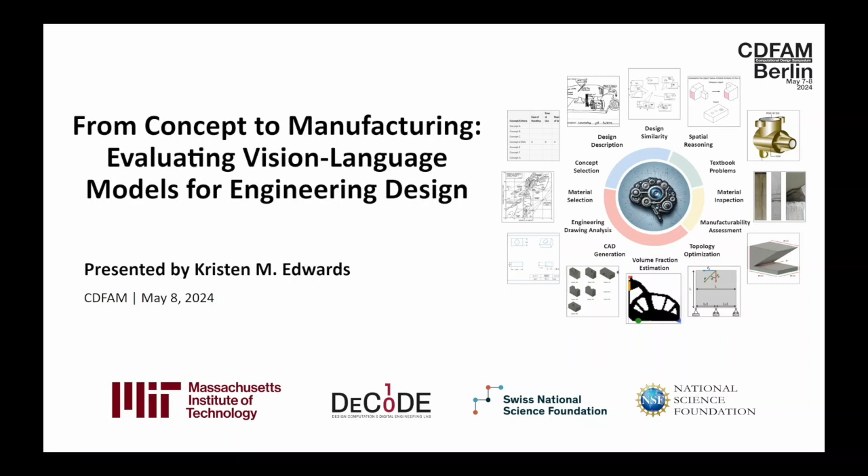Today, I'm excited to talk to you about a recent research work that my team and I completed called From Concept to Manufacturing, Evaluating Vision Language Models for Engineering Design. So to briefly introduce myself, my background is in mechanical engineering. I hold a bachelor's and master's degree in MechE from the University of Maryland and MIT respectively. And I am currently a PhD candidate at MIT in the DeCoDE Lab, where my research is largely around the interface of artificial intelligence and engineering design and development.

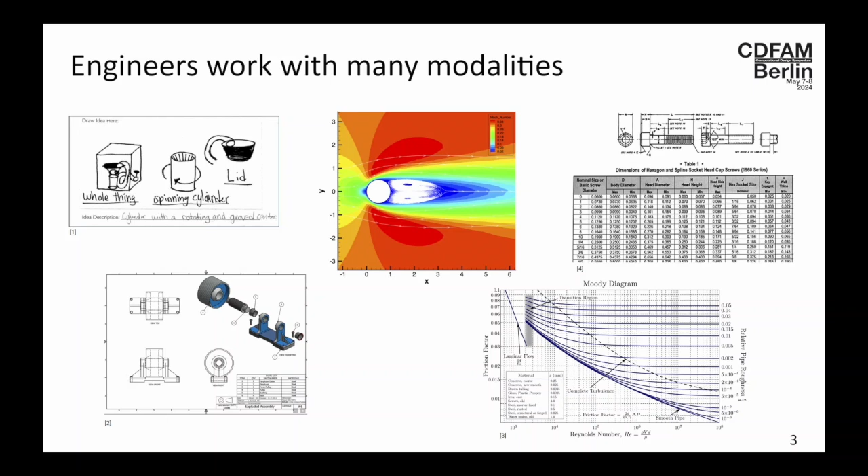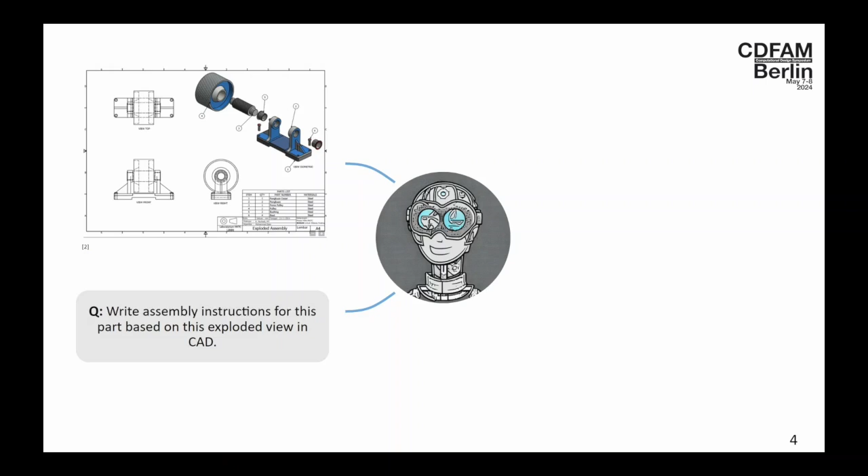So without further ado, as engineers, we work with data in tons of different modalities. You might be looking at a hand-drawn sketch from the early stage conceptual design phase, or a CFD simulation, or even a table of part information for speccing parts. Because of this, a useful AI agent for engineers would need to be able to intake these different data modalities. For example, taking in an exploded view of a CAD assembly and the prompt instructions, write assembly instructions for this part, interpreting both logically, being able to cross-reference them, and then outputting logical and coherent instructions that would be useful for an engineer.

This feels like science fiction, but it's interesting to ask how close are we to an AI agent that could actually look like this? Well, there do exist vision language models, which are multimodal machine learning models. Some of them that you might have heard of are GPT-4 Turbo or GPT-4V, Claude, Gemini, LLaVA 1.6, and these are very similar to large language models, which have had a lot of traction recently. The difference is that they're not just trained on text, but they're also trained on images. And in part of being called large, they are billion parameter models that have been trained on much of the internet.

Because of this, there are a couple key qualities to vision language models, or VLMs. The first is that VLMs are quite versatile. Anyone who's tried out some of these has seen that you can give it many different tasks from many different fields, and it has some sense of understanding. This brings me to the second point, that VLMs have some sense of global knowledge. And this, as I mentioned, is because they've been trained on much of the information available on the internet. And lastly, via their chatbots, there's a simple and intuitive interface. So the barrier to entry for an engineer using this is quite low.

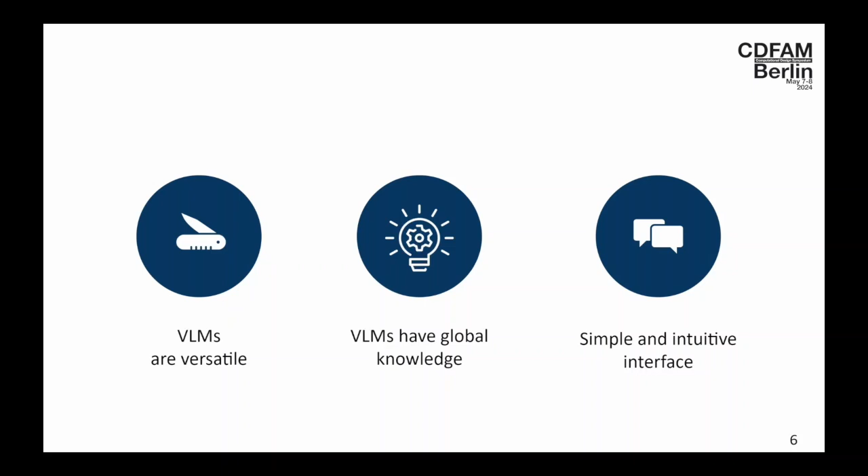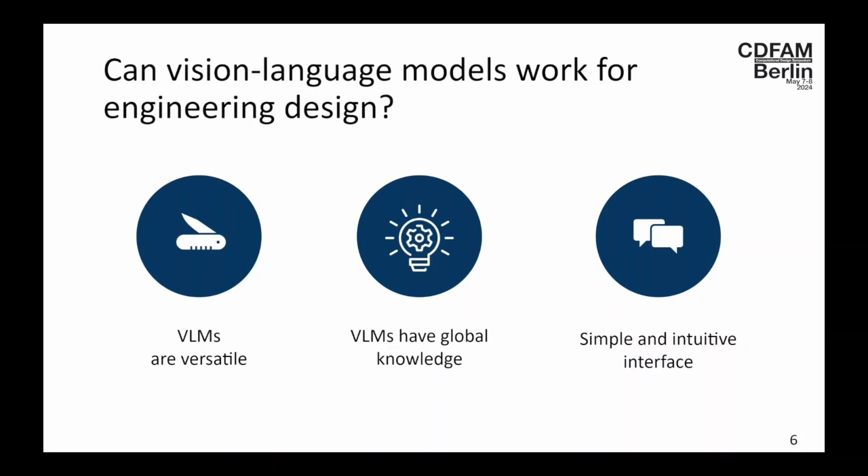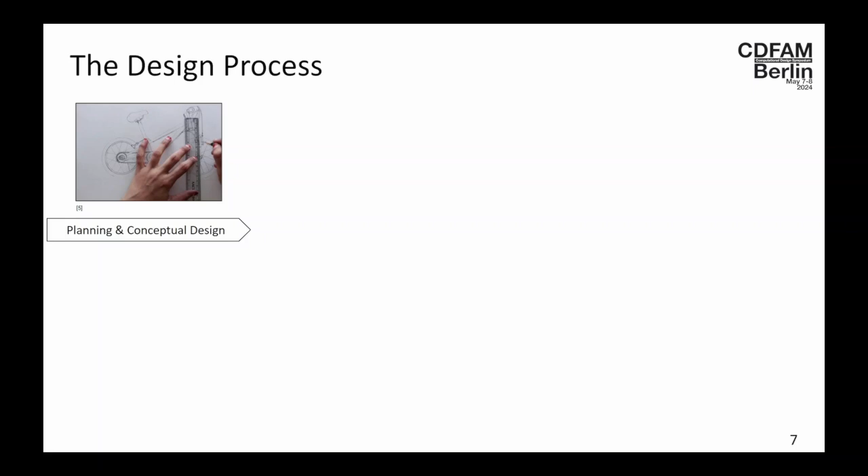But this beckons the question, can vision language models actually work for engineering design? And this is the question that inspired this work and that I'll try to touch on throughout the rest of my presentation. So this is quite a broad question, and in order to scope it down, my team and I decided to scope it via the design process. So we all have mechanical engineering backgrounds, and we used the typical product design process that we're familiar with, which starts typically with planning and conceptual design. This is where you might identify user needs, determine your product specifications based on them, and start ideating, coming up with tons of different concepts.

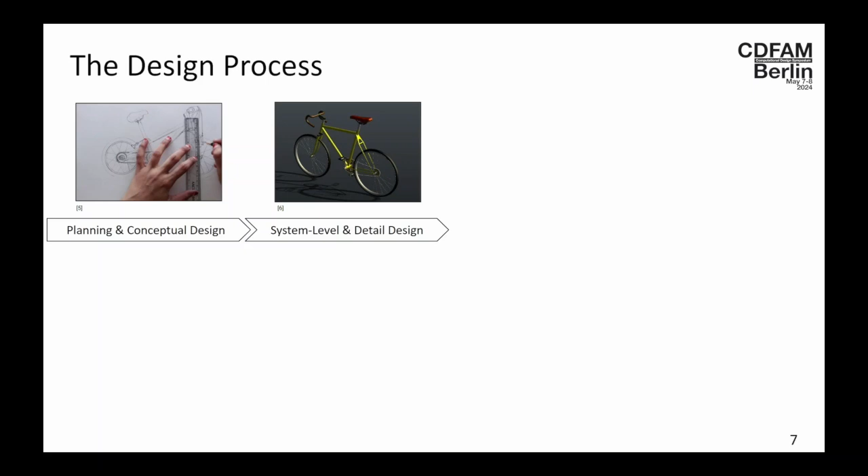Moving next into system level and detail design, this is where a lot of the classical engineering work that we think of comes in. So you might determine if your part is going to be an integral or modular structure, what the subsystems will be, material selection, etc. And finally, manufacturing and production. And then we also wanted to add this other part to our scope, which is engineering education. And in particular, we were curious if vision language models had any sense of spatial reasoning, given that that is such an important aspect of the engineering design process.

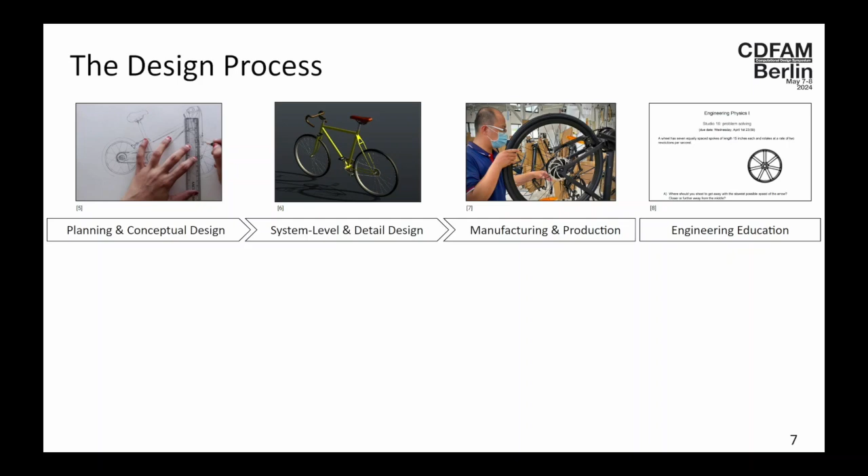So within each of these categories, we developed a number of tasks, and we explored each of these to determine how well vision language models could perform at them. So this is how I've structured the rest of my talk, and we'll go through a select few of these tasks given the time constraints, and talk about how our findings were shaped by them.

As an overview of the experimental approach that we used, we focused mainly on GPT-4V, which is a closed source model by OpenAI. And when we first began this work, it was only available via the ChatGPT chatbot. So they hadn't yet released the API for it. We also saw how well LLaVA 1.6 34B could perform at these tasks. And on the contrary to GPT-4V, this is an open source model. And we had access to its API immediately, which made it a lot easier to run a large number of experiments. We focused only on engineering tasks that required both some visual and textual input, given the nature of our work.

And we tried to make it as quantitative as possible, but a huge disclaimer here is that large language models, vision language models, this field in general is changing rapidly. And so the results that we found could be different today and will most certainly be different in a month as new models are released.

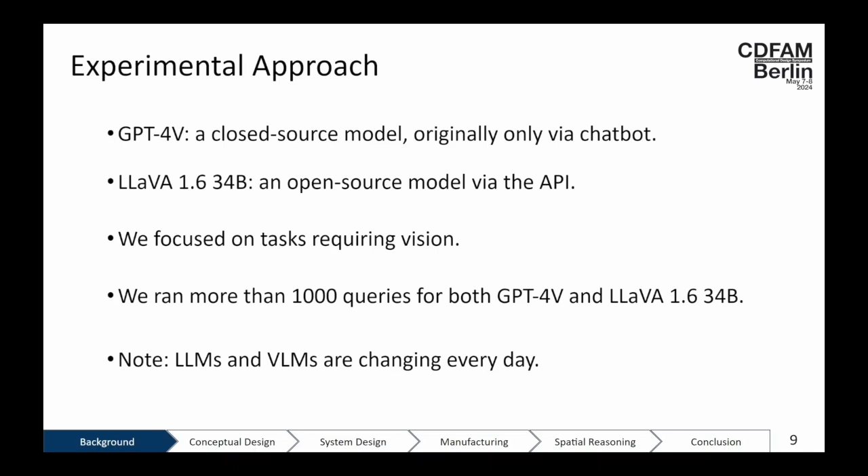So first, I'd like to give you a little sneak peek into our key findings. Essentially, these are loosely categorized as pros and cons. In the pros category, we found that there is promising optical character recognition. So this means it's kind of a computer vision task. When looking at images, GPT-4V in particular was able to pull out characters or text quite well, even for handwritten images. There is definitely a level of high-level knowledge, and we could see this through a number of our tasks.

And another pro is that when the vision language models were unsure, due to their structure, they're able to request additional information, and so there can be iteration between the user and the model. In terms of some loosely cons, there is a tendency towards caution in certain answers, and so this can sometimes present itself as a reluctance to answer a question at all. We see that spatial reasoning is a major area of limitation. And lastly, there's a lack of precision when interpreting images.

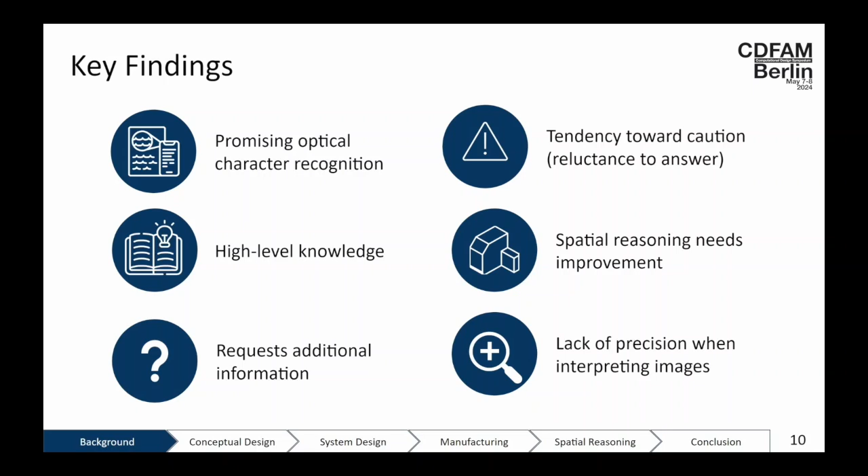And so for the rest of the talk, I'll point out how the different experiments that we ran led to our key findings. So starting first with conceptual design, here we looked at two tasks. First, design descriptions, and second, concept selection.

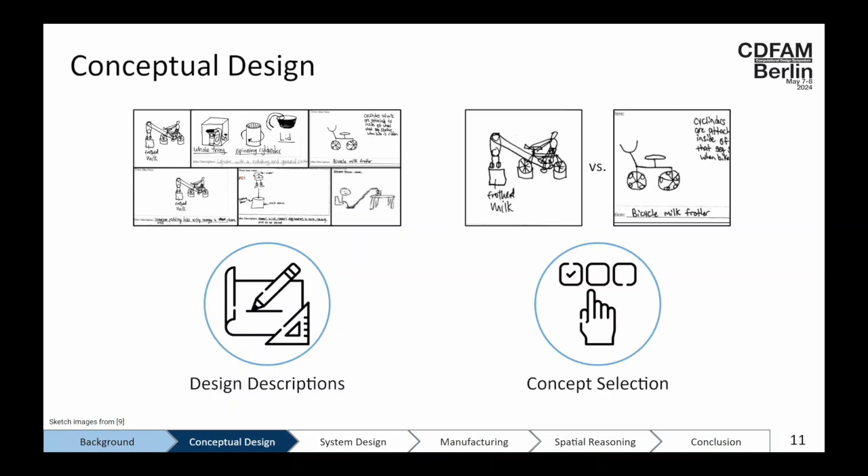So for the first task, the data set that we're dealing with is a data set of around 1,000 sketches that were made by university students, where they designed a part, and then they also have a handwritten description at the bottom. And here we wanted to see if vision language models were able to correctly match the description to the given sketch. So we asked the multiple choice question, which text description matches the given design? And then we provided the image both with the handwritten description and with it removed.

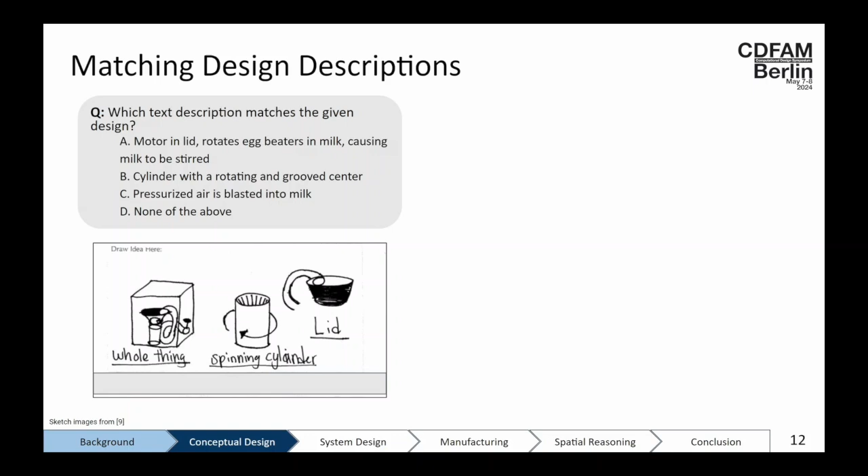And our results are as follows. As we kind of expected, when the text description was still available, there was 100% accuracy in matching the sketch to the actual text description. So this suggests to us that there is promising optical character recognition and there's quite good sketch interpretation. Then once we removed the text description from the bottom, we see the results plummet. Accuracy drops to 53.3%. This isn't so surprising, but it's still useful to quantify. And this suggests to us that more context, aka the handwritten description, improves results.

But then interestingly, we noted that when GPT-4V in this case was making errors, it was most often erroneously selecting none of the above. So if we didn't provide a text description, it would say that none of the multiple choice options were correct. But when we removed that option and it was forced to choose between 3 text descriptions, the accuracy improved from 53.3% to 70%. And this starts building the case that GPT-4V tends towards caution, which is useful for understanding as we move forward.

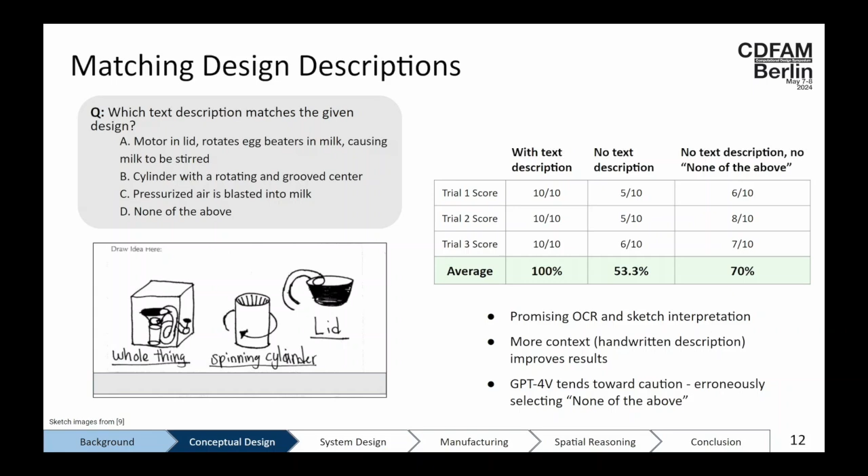The next main task that we looked at within conceptual design is concept selection. So what we did here was use a task and try to determine the user needs, and then try to determine a Pugh chart, which I'll explain a bit more in a second. So we prompted GPT-4V with this task. A medical supply company retained a product design firm to develop a reusable syringe with precise dosage control for outpatient use. This comes directly from a product design textbook, and because of this, we have some sort of ground truth for both the user needs and the resulting Pugh chart.

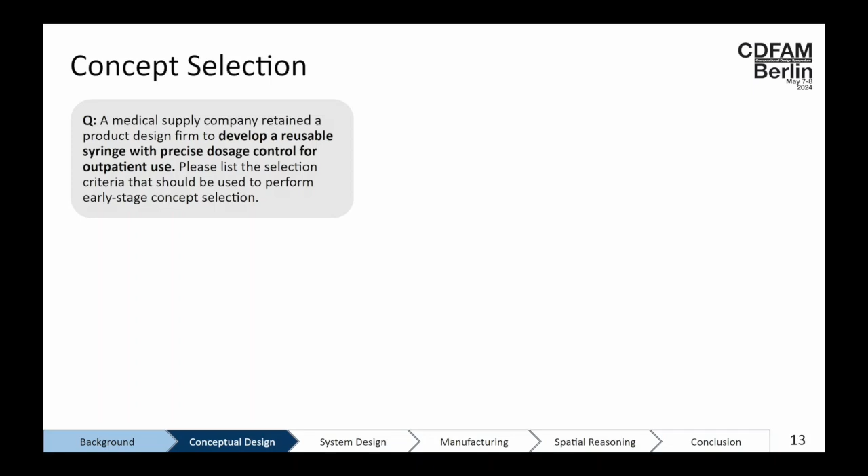And we asked it to list the selection criteria that should be used for concept selection here. And so here we compare the selection criteria that were identified from the textbook with the selection criteria that GPT-4V generated. And what we saw is that for every one of the ground truth selection criteria, there was a matching one developed by GPT-4V.

So this started to give us a sense that GPT-4V has some high-level knowledge to generate user needs or selection criteria. But then the real test is, can it use this to make any informed decisions? So here we went to making a Pugh chart.

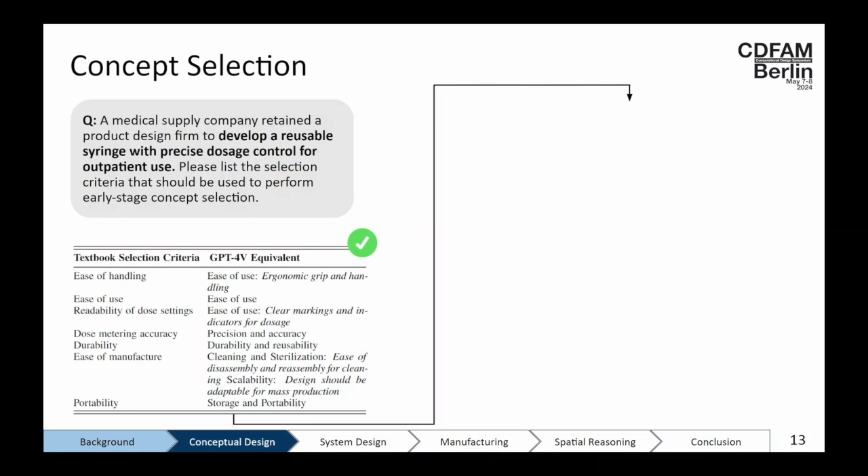And for anyone who's unfamiliar, a Pugh chart typically has the row headers as different selection criteria and the column headers as different concepts. And then you subjectively rank your concepts based on their performance for those selection criteria. So we provided seven designs that were also from the textbook. And we said, given these and the selection criteria that you found, can you make a Pugh chart?

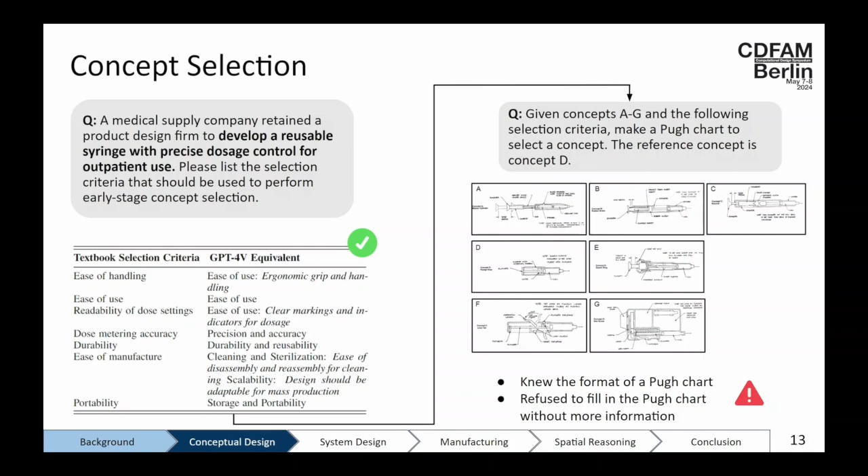Here we saw that it knew what the format of a Pugh chart was. It was able to tell me the rows and the columns and how there would be some reference concept and that you would subjectively rank the other concepts based on their performance against that one. But it refused to fill out the Pugh chart. And upon every iteration, it would refuse to do this without more information. And so this once again drove home some level of caution.

So the key findings that these experiments kind of supported were, one, the promising optical character recognition, which we saw in the early design description task, that there is some high-level knowledge, it understood what a Pugh chart was, ability to request additional information, and a tendency towards caution or a reluctance to answer sometimes.

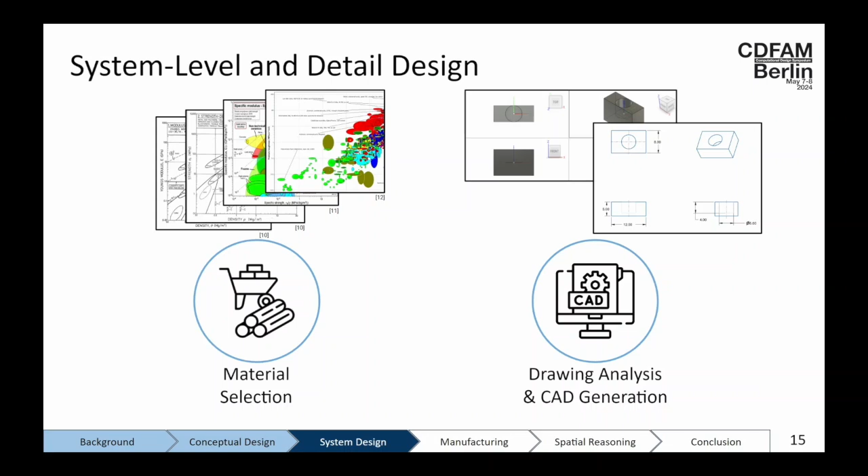Moving next into system level and detail design, here our two tasks were, one, material selection using Ashby charts, and two, engineering drawing analysis and CAD generation. So first for material selection. Here we provided an Ashby chart, and for anyone not familiar, this is a chart which has two material properties, one on the x and one on the y axis.

Here we have density on the x-axis and Young's modulus on the y, and then it plots different materials and groups of materials, and an engineer can use this to identify which material they'd like to use given their properties. It's a bit archaic probably, but as an engineering student, this is something you see, and we thought it would be a really interesting task for understanding some of vision language models' capabilities.

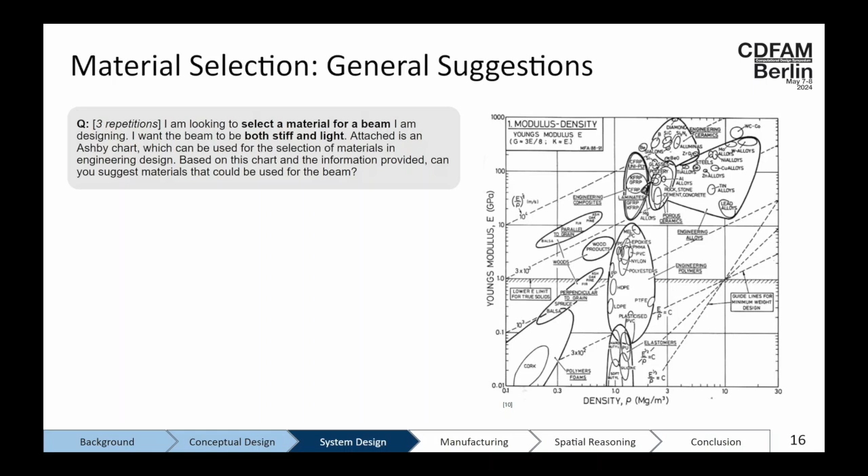So in this case, we kept our ask quite broad. We provided this image, and we said, I want to select material for a beam, and I want the beam to be both stiff and light. And GPT-4V was able to appropriately select a number of different materials that meet these qualifications. But next, we wanted to make it a little more challenging and a little more precise.

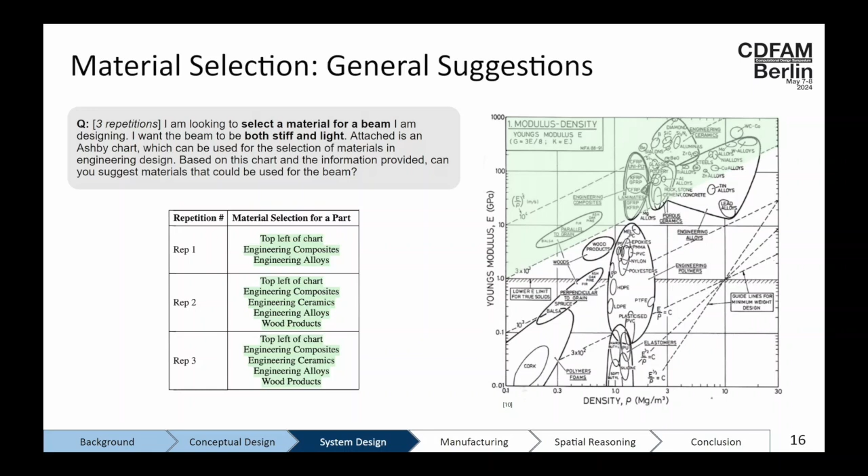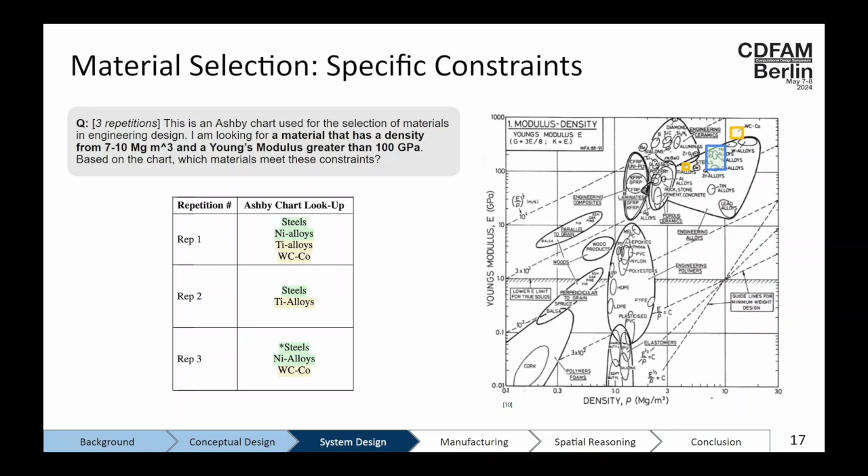Once again, this starts suggesting that there is some promising optical character recognition, or perhaps it didn't use the chart at all, but instead just used the LLM capability and used its understanding of materials that it expects to be both stiff and light. But we do see that there's a lack of precision when interpreting images. So despite being given that plot, it wasn't able to precisely identify which materials would meet the design task.

Next, for engineering drawing analysis. So here what we wanted to see was, can GPT-4V interpret dimensions from an engineering drawing, and can those dimensions be used for downstream tasks?

And this is kind of funny to me because I made this drawing back in 2017 in my first CAD class, and I never thought that I'd be looking at it so much again, but here we are.

So in this case, we said, this is an engineering drawing of a part showing 4 views of it. Can you tell me what the part is? And what we were looking for is an answer of, this is a block or a rectangular prism with a blind hole. Because as you might have noticed, the hole doesn't go all the way through the block. It has a depth of 4 compared to the block's depth of 5.

GPT-4V could only correctly identify this 1 out of our 9 trials, and we upped the trial numbers later on. But essentially, we saw the same results. It repeatedly called it a block or rectangular prism with a through hole, so it was unable to interpret those dimensions to accurately understand what the part was.

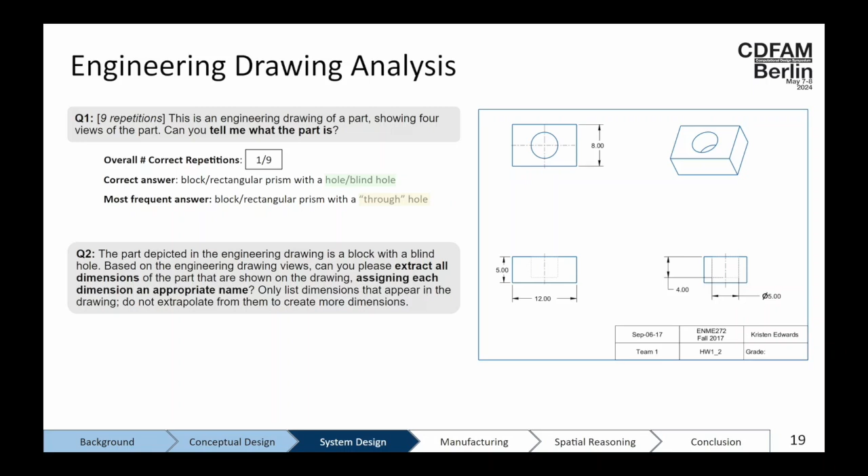But once we told it what the part was, we said, this is a block with a blind hole. Can you please extract all of the dimensions and give them an appropriate name? It was actually a lot more successful at this. So 6 out of 9 times, it was able to correctly identify the 5 dimensions given here. And we allowed for any permutation of width, height, and depth, given that those just need to be accurate within themselves. But what it struggled the most with defining was, once again, the depth of the blind hole.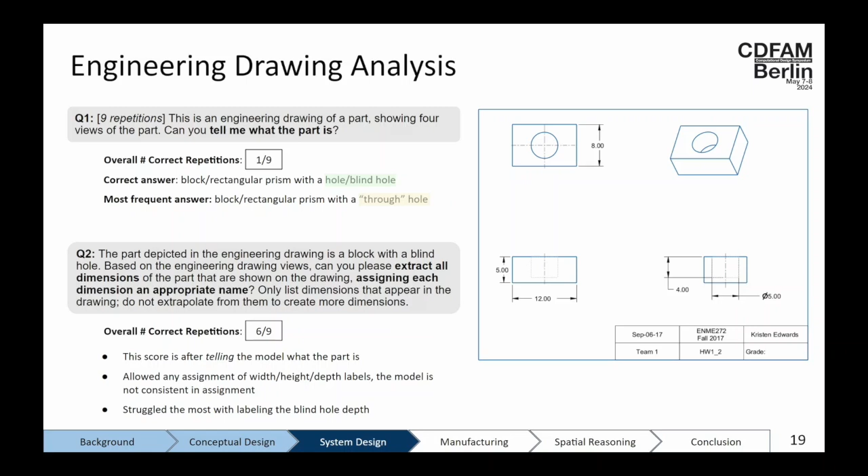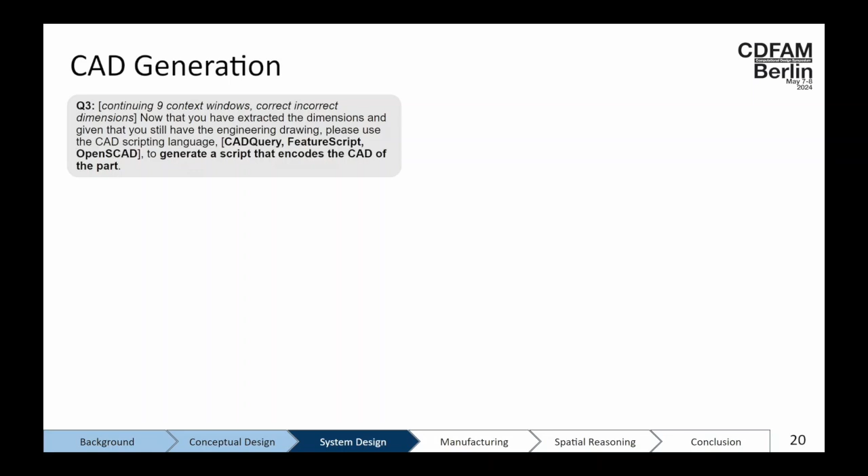So the next step was, can it use these dimensions to actually generate CAD? In this case, we gave it the correct dimensions, and we said, now that you have them, and you have the actual drawing at hand, can you use a CAD scripting language? And we used 3, CadQuery, FeatureScript, and OpenSCAD, to generate a script that encodes the CAD. And so it would answer in the form of a script, and we would run the script ourselves, because at this point there wasn't any API integration.

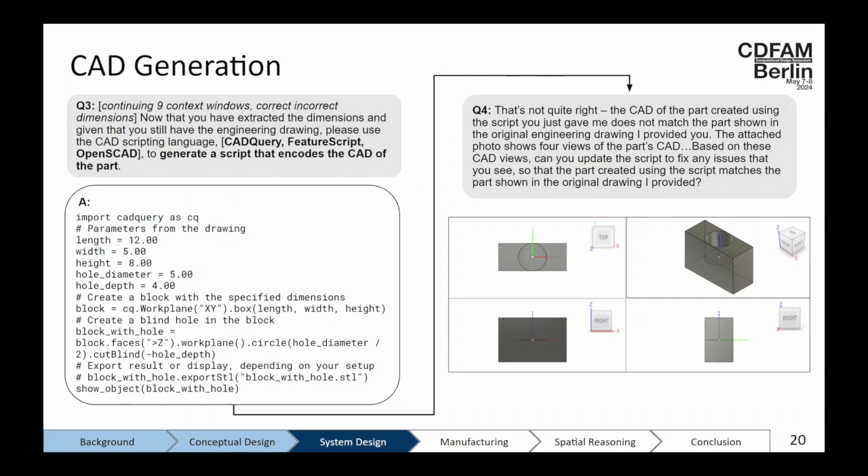And if it made it correct immediately, we would stop, and if it didn't, we would do up to 5 iterations where we would say, can you try it again? Please refer back to the image that we've provided. Our results here are as follows. So for CadQuery, GPT-4V was able to correctly generate a CAD 1 out of its 3 times. So the top 3 are using CadQuery, and the bottom are using OpenSCAD.

Overall, that was the only time that GPT-4V was able to generate a CAD script that correctly made the part. And you may have noticed FeatureScript isn't on here once. GPT-4V was never able to generate a script that ran without syntax errors. One other thing that we saw is that there was a forgetting of the dimensions when we would iterate. So around generation 3 of iteration, it would often just begin making up dimensions despite having known them in earlier iterations. And we see that iterations didn't really improve the results.

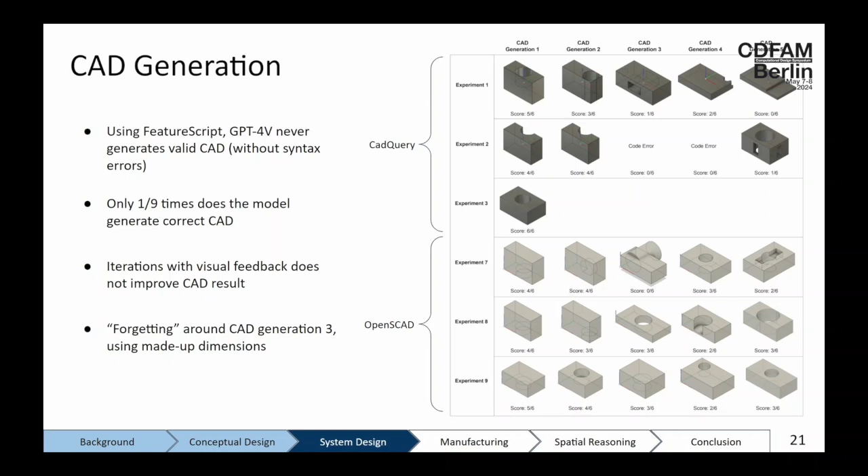So this kind of leads to a couple of our other findings. There is some high-level knowledge of CAD scripting languages. So as we saw, it was able to generate runnable scripts in CadQuery and OpenSCAD, but spatial reasoning needs major improvement, and once again, there's that lack of precision when interpreting images. And this is kind of demonstrated by not being able to extract those dimensions.

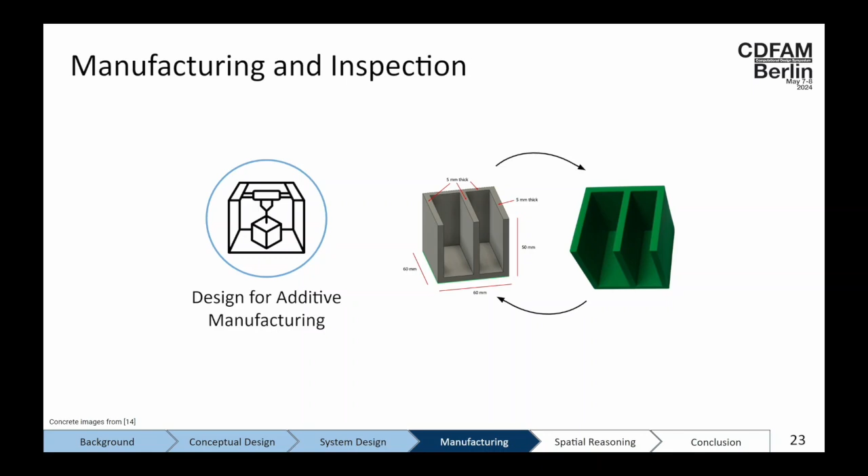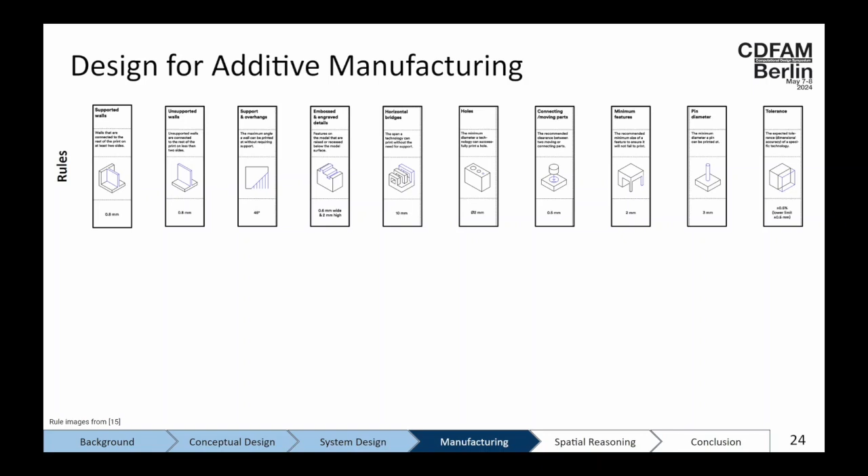And finally, manufacturing and inspection. We did a number of tasks here, but I'm only going to touch on one. And this was where we were looking at design for additive manufacturing with a very small scope. So what we did was provide 10 additive manufacturing rules, which are available from a company called Hubs. And it's available as an image, which was useful given our tasks. And then we made 10 parts that are deemed unmanufacturable because they specifically violate one of the rules, and then 10 parts that are manufacturable. And we actually printed these parts just to be sure that they are manufacturable.

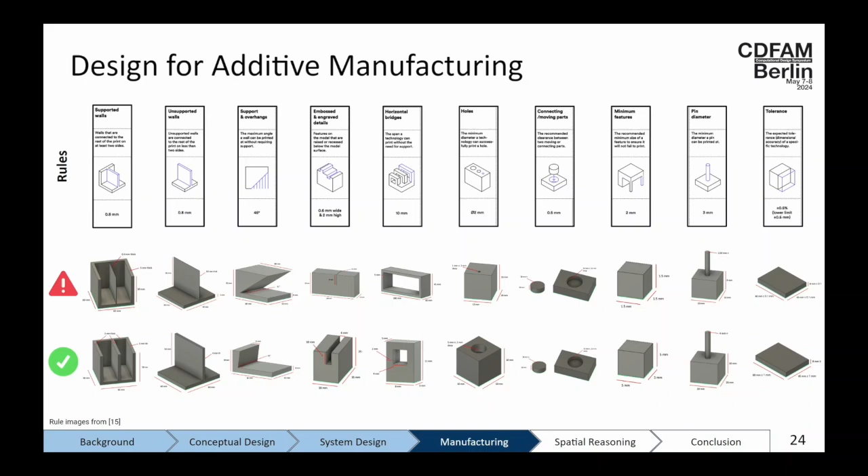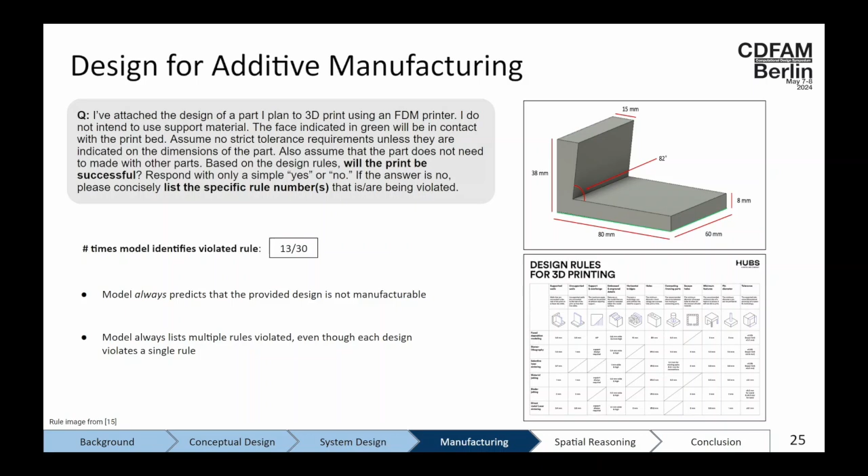And what we wanted to see was if given the rules and given a part, GPT-4V could identify if it was manufacturable or not, and if it's not manufacturable, why. And what we found is that GPT-4V always predicted that the part was not manufacturable. Even for parts that are very clearly easy, simple, we did print them. And then it correctly identified the violated rule 13 out of 30 trials, but even this number is a bit skewed because it never identified one single rule, even though that would have been correct. It would always choose multiple.

So this suggests, once again, a tendency towards caution in that it said none of these parts will print. Spatial reasoning is limiting again, and then lack of precision in that it should have been able to, one, understand the rules, and two, use the dimensions provided in our CAD parts to see that something did or did not comply to a rule.

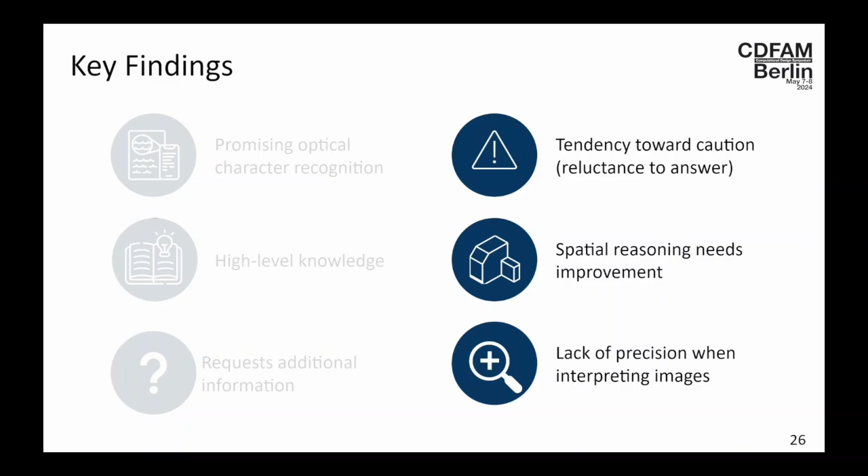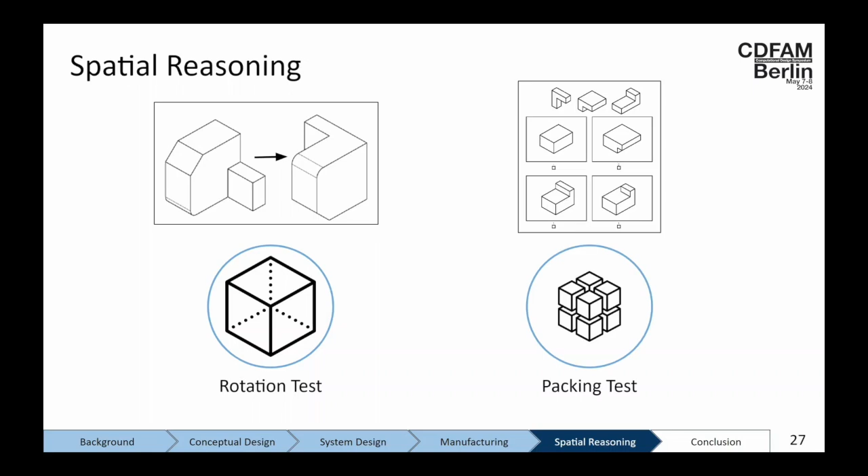And so finally, we wanted to drive home one of our key findings, which is that spatial reasoning needs improvement, with a pure test of it. So we used two kind of classic spatial reasoning tests that humans take, the rotation test and the packing test. And they're shown here. And in general, these are slightly difficult.

So for the rotation test, you see an object rotated, and then you want to do the analogous rotation on a new one. And then for the packing test, you're just choosing which of the many options would pack into the correct shape. Despite being kind of tough, humans usually score around 65 to 70% on these tests, and given their multiple choice statuses, a random guess for rotation would have been 20%, and for the packing test would have been 25%.

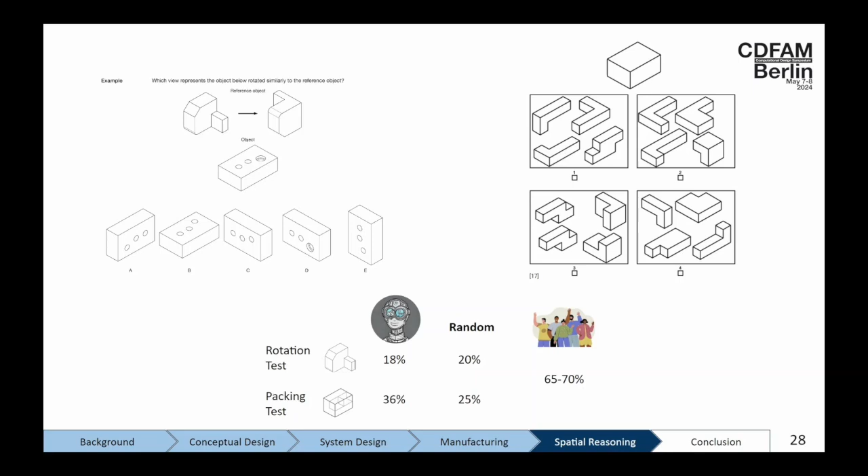GPT-4V performed about at random for these. So this really drives home that spatial reasoning needs improvement if we want this to be useful for engineers.

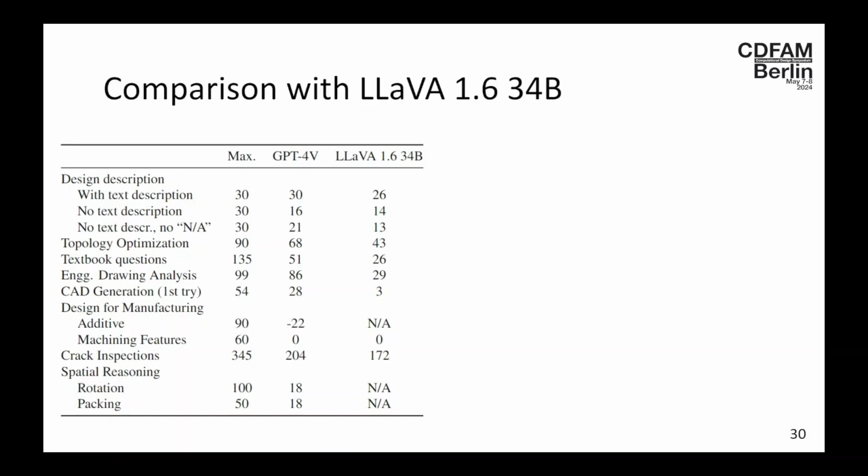Now, briefly, the comparison with LLaVA. This whole time I've been talking most extensively about GPT-4V, but we also tested this with LLaVA 1.6 34B. And across all of our quantitative tests, GPT-4V outperformed LLaVA. So here a higher number is better. And in every case, we see GPT-4V outperforming it, which is interesting because LLaVA has outperformed GPT-4V on some classical multimodal benchmarks. But as we can see, those benchmarks don't necessarily translate into an engineering domain.

One point that I found quite interesting is that LLaVA was imperfect in OCR. So if you recall back to my first experiment that I showed, where we had a sketch with handwritten text at the bottom, and then we tried to match that sketch to a text description, GPT-4V performed perfectly in this, and that's in part because all it had to do was interpret that text. But LLaVA didn't perform perfectly at this, which is an interesting finding and suggests that maybe its OCR could use some work.

And then finally, there are a number of NAs here, and that's because LLaVA 1.6 34B also can only intake one image as input per thread. Because of this, many of the tasks that we developed were inaccessible to LLaVA, and I think in general that vision language models can benefit by being able to intake more images if engineers are to use them, because then they can cross-reference and you can provide iterative feedback.

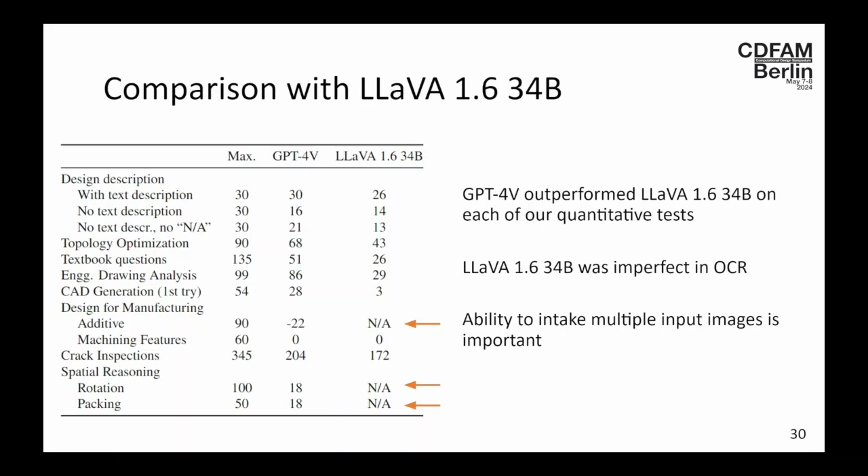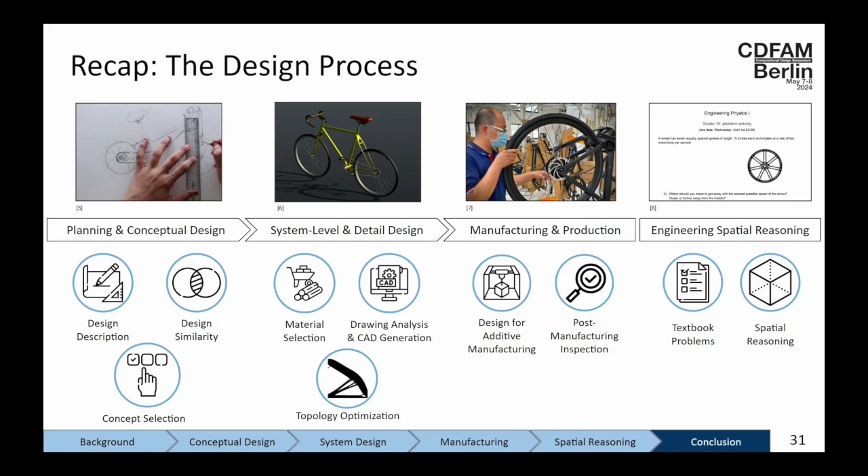So as a recap, we looked at the design process and identified many tasks in here in order to test vision language models' performance and see where they stood in terms of engineering design tasks. Generally, these are the key findings, and if we sort them loosely into pros and cons, there are a couple steps that we can take looking forward. One, we can utilize the existing pros. For example, we saw that optical character recognition is quite good.

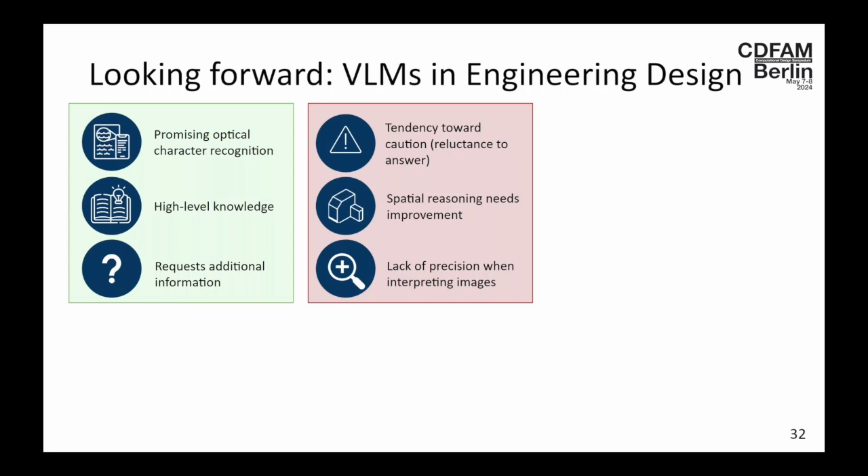In addition, I found that sketch interpretation and being able to take creative steps after a sketch was given was quite high. And so the project I performed right after this was called Sketch to Prototype. And here I input just an image of a sketch with a handwritten description. In this case, a mug that looks like a backpack. It has handles as straps. And converted that from sketch to text, text to more detailed image, detailed 2D image to a 3D model, and then I printed it out.

So there are already some things that vision language models are capable of doing, but given that we've noticed many areas of improvement, I would say two points for improving spatial reasoning. One, you can use custom GPTs, which integrate Python into a VLM, and there you can use the spatial reasoning powers already existing in Python packages to try and supplement the downfalls of vision language models. You can also use vision language model APIs and then combine them with existing tools.

Another step forward is changing the way that we pre-train these models. So one option is changing the data set that we use. This can be quite tough because they've already been trained on a huge amount of the internet, so fine-tuning is difficult. But we can also change the pre-training objective to make it more dialed in to spatial reasoning. And in order to do this last point, we need to create meaningful data sets that suit engineers' needs. And I see that there's already a ton of work being done here for that, and I think that will be really important and powerful moving forward.